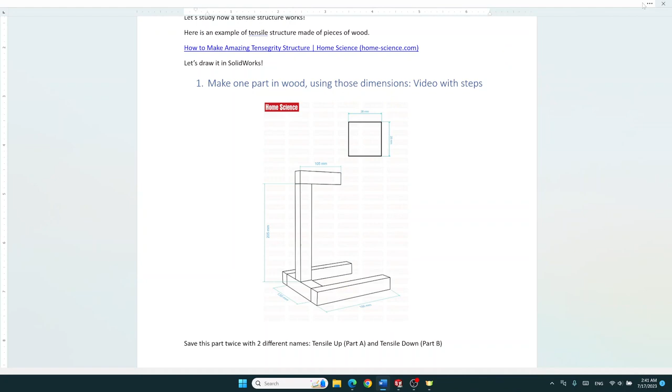And we will start by drawing this one and add the different features. Okay, that will be just one full part. All of this, like this kind of T shape, L shape. But I will start by this one. So 135 long and 28 by 28. The question is, where do I draw this part first? Where is the referential? Because the referential will be super important to find the center of gravity.

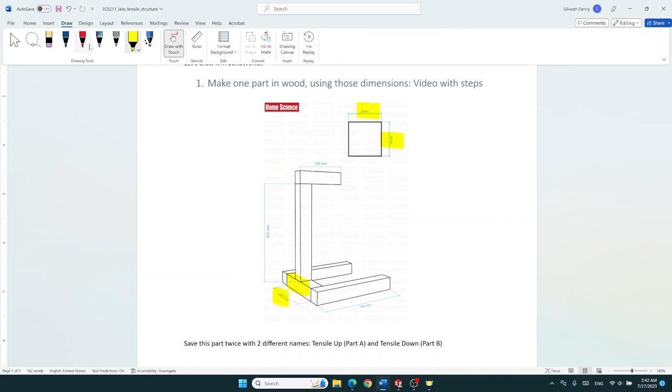So I will use a referential like this. So at the center, this one in the middle, that will be the y-axis, and I will use two axes like this and like this. So to have a positive referential, that will be x, y, and z. In Solidworks, the x and z are on the bottom plane, so that will be easier to follow the same thing. Oops, and that is the y.

So what I will do, I will select the plane x and y, draw a section of 28 by 28 and extrude it 135 on both sides. Okay, so I will have to draw my first little square. Let me draw it with another color, blue. That will be this little square there, you see, and I will extrude it. So let's do that.

Open Solidworks. I will make File, New, and I will select the part. First thing I will check is the unit. I will check the unit there. My unit should be millimeters. Okay, it's there. I will save my part, File, Save As.

So I will go into my ECE211 lab tensile structure, and that will be tensile part A. There's part A and part B. Part A. You can also add your name to it. That will be nice. Something that we notice, the section is only 28.

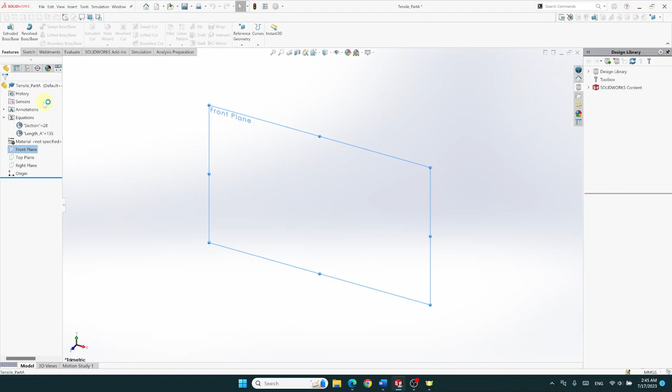Remember, we said that we will use the xy plane. So if you go over the different planes, you can see where they are. This one is the top plane or the bottom plane, the z-axis. This one is the right plane, zy, and we want to use the front plane. So we click on the front plane, and we go on Sketch and create a new sketch. Okay, we see this one is the 0, 0.

So we will draw a little square. And we want to align, so when we move, we have the vertical square there. That means that we are vertically aligned with the point, this way. We have the horizontal line aligned with this one. And we add smart dimensions, double click on that one. And instead of writing 28, you will click equal. I click equal, global variable, and I select section, and OK.

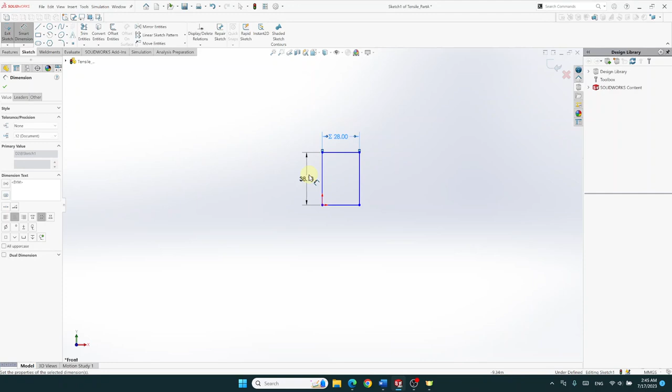Double click on this one. I click equal on my keyboard, global variable, section, OK. Oh, my little square is blue, so you never want it blue. So let's click OK. I want these points to match these points. So if you see, I can move it up and down. Maybe yours, you cannot move it up and down. It depends on the little relations that you added, and sometimes that's correct, but mine is not.

So I will click on the corner, bottom corner. I click Control on my keyboard and I select also the center there. Now I can say that they are vertical, horizontal, or even coincident. Let's put them coincident.

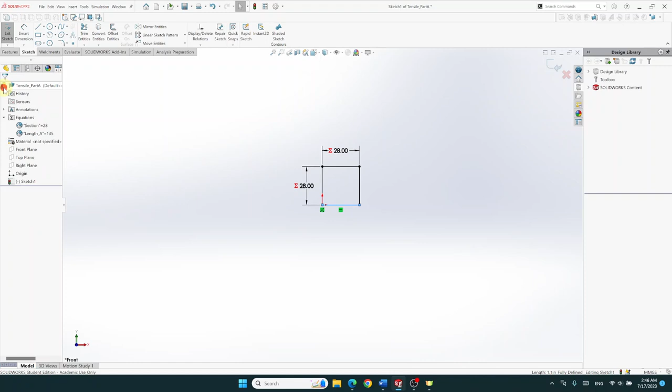That means that my square now is black. I mean it's fixed on the referential and it will not move anymore. I click Enter. If I try to drag it, I can't in any direction. Okay. And I can click on Features before I exit my sketch, and I can click on Extruded Boss/Base, so I will extrude it on both sides.

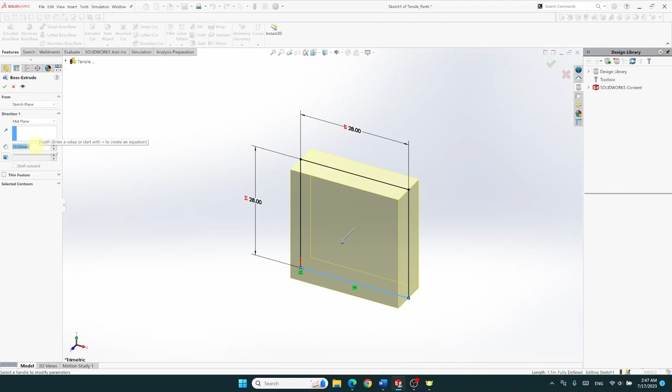I want to extrude it mid-plane, and the distance is not 10, it's 135 millimeters, but remember I made a global variable for that, an equation. So I can click equal, global variable, length A, and enter. And here we go, I have the first part. I save, always save. One thing I didn't do that I can do if I want now, but I don't have to, I can add the materials.

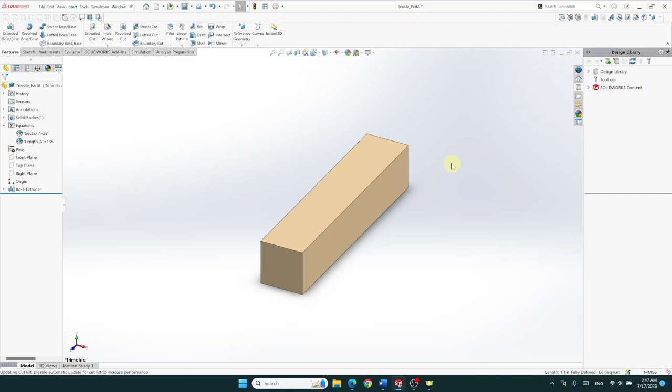Let's do it now. You right-click, edit materials, and we can use a wood, any one, let's say pine, apply. Oh, pine, I just have the density, that's perfect. I just need the mass density. Apply, and close. Here we go. Now it looks like pine. Don't forget to save. So I come back to my dimensions.

So I did the little part on the bottom. Now I need to add the front and the back and the up and the down. And you see we have 3 more dimensions to add. I will add them one at a time. Let's do this one, 190. And I can do both at the same time. So I will add a section in the plane YZ, and I will extrude it 190. Okay. So I draw the section there, and I extrude both of them together, 190.

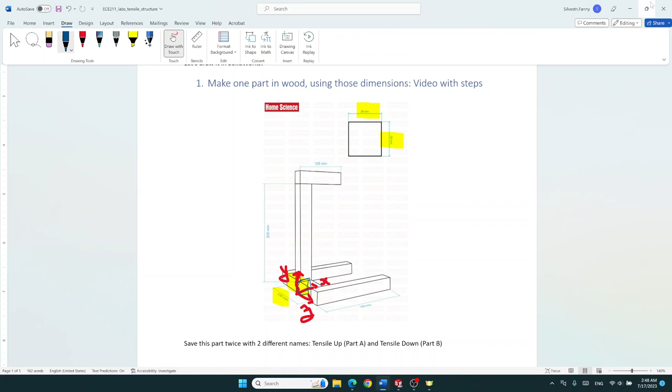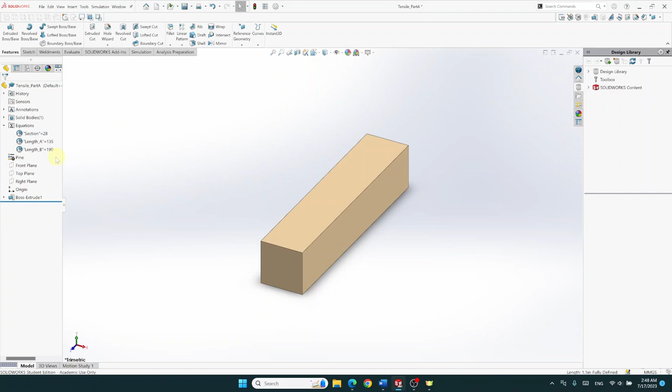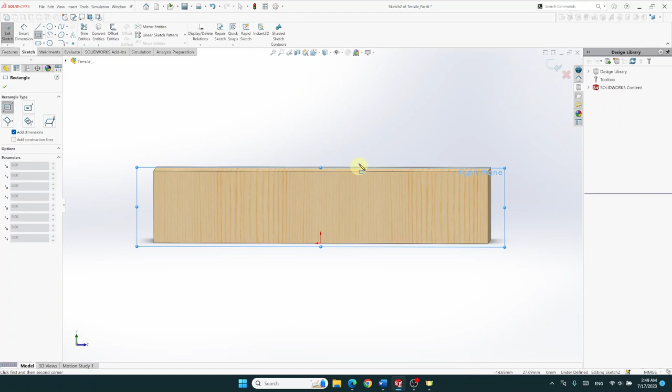So first step, let's go back in Tools, Equations, and I will add length B. It's a global variable, it's 180, enter. Okay. So remember, I want to be in the right plane, so I click on the right plane, sketch, a new sketch. Okay, I am on that side. If I want to be on the other side, I can click on Control. Let me remember. Not 1, not 2, 3. So 3 and 4 make you go on one side or the other side. That doesn't matter at all. Let me show you where we are. Okay, we are there, so that's perfect. Okay, so Control, I said 3.

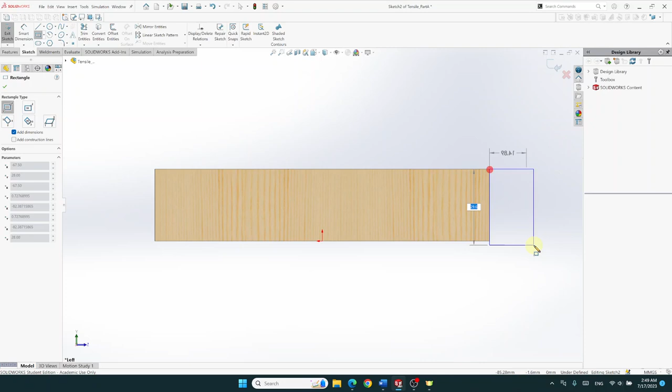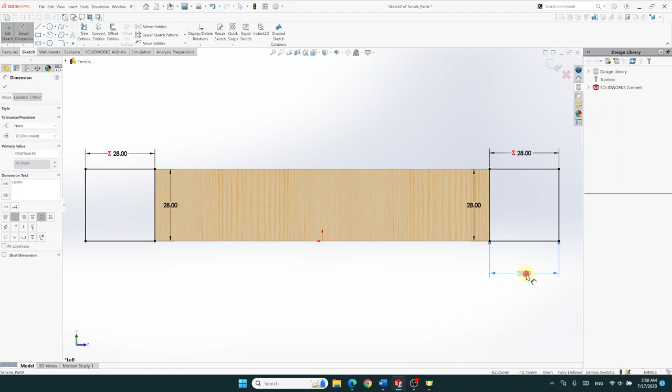Here we go. So I will add 2 little squares. I can select there. Oops, I forgot to click on the rectangle. This one, to this one, and this one to there. And I will add the dimension. So that's my section. That's also 28, equal global variable section. Enter. Double click. Equal global variable section. Enter. And you see it's black because it automatically fits with the bottom there. Oh, no, I don't want to do that one. Delete that. And that's enough.

And I will click on Features, Extruded Boss/Base. And I want to extrude it not 135. I want to click equal global variable and length B and enter. Here we go. Let's save. I have made those 2 lengths there. Let's add now this one on the top. So I will use the top surface of the first part that we drew. I will draw this 28 by 28 section and I will extrude it to 205.

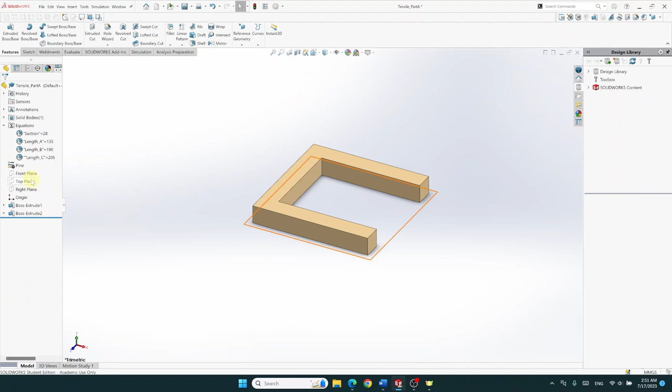So I need Tools, Equations, and length C is 205. Oops, I forgot. Length underscore C. Here we go. So I don't want to be in the bottom plane or this top plane because it's below the part. I want to be on the top because the 205 dimension is from the top. So I select the top surface and I will click Sketch and make a sketch. I select the square and I will make my square like this. Dimension is 28.

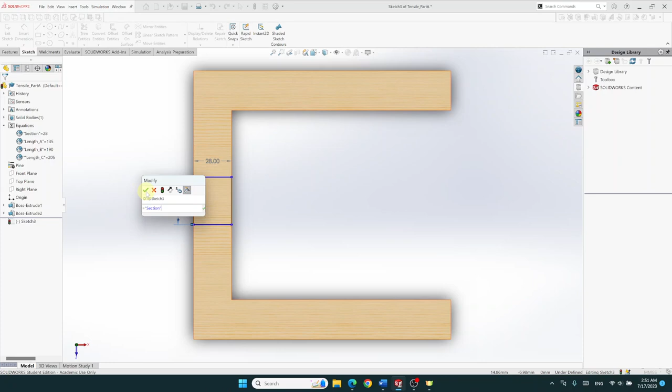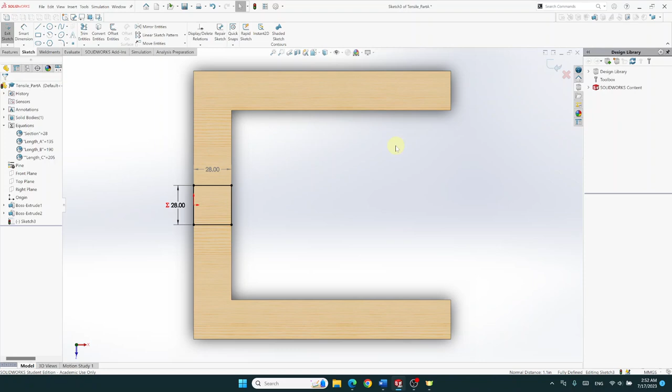Okay, and you see I can still move up and down. Oops. Let me remove smart dimension. So I need to say it's centered. There are different options. I can make a dimension from this line to the point of 14, or I can select this line, click Control on my keyboard, select the center of the axis, and select midpoint. So now my referential X and Y are centered on that little square. Perfect. Black means it cannot move, dimensions are set.

I click Features, Extrude, and I want to extrude it. Oops, equal, global variable, length C. Enter. Oops, I have to click like this. Enter. Oops. Let's go back.

Okay, let me just put, I think, because I put length at the beginning. Let's do yes. Oh, because I put this one. Okay, that's just my mistake. Let me go back on Tools, Equations. I'll delete this one. How do I delete this one?

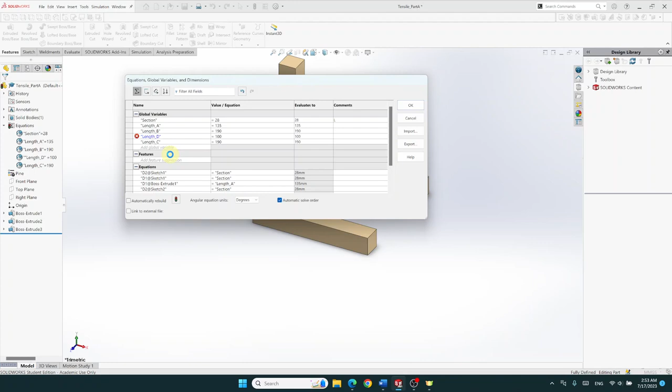Okay, I will use for the last one length underscore D. Don't do like me, okay? This one will be something else, 100. I don't remember. Oops, but this one will be 205. Oh my God. Sorry. Here we go. Oh, I see, I forgot this one. Oh, now I cannot escape. Okay, to cancel. Here we go. And now this one, let's do 205. You should see this one going up a little bit.

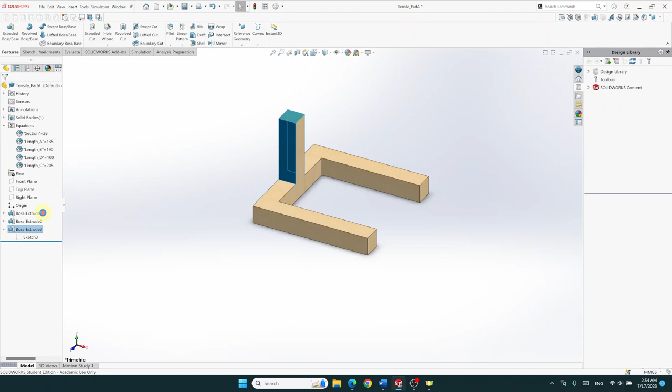Okay, so my length is 205, my length is 100, but for this one I used edit, I used length D, I want instead length C. Here we go. You should not have to do all of this. Okay, now it's good. I have my length C 205, and I will check the last one. So now I have to do the very last little part. Oh, it's not 100, it's 105. So we'll put 105. It's a 28 by 28 and 105 long.

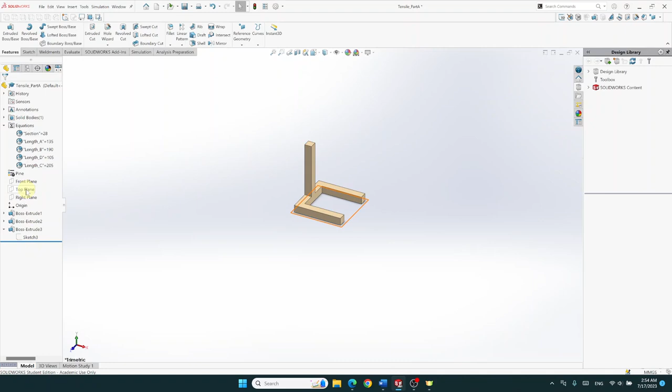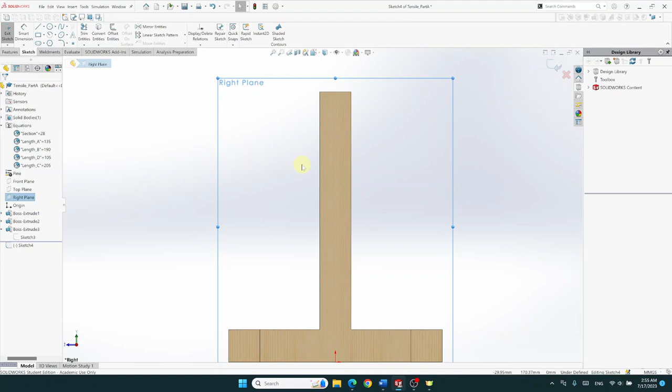So I go back there. I will change my length D right away for 105. That was my mistake. And they don't get in alphabetic order, but that's okay. Here we go. I can use the right plane on the back. Sketch. Edit the sketch. I can click on Control 2. No, Control 4, and you will see the view will be from the back of the right plane. You can try Control 1, 2, 3, 4, 5, 6, 7. You will see you change the view.

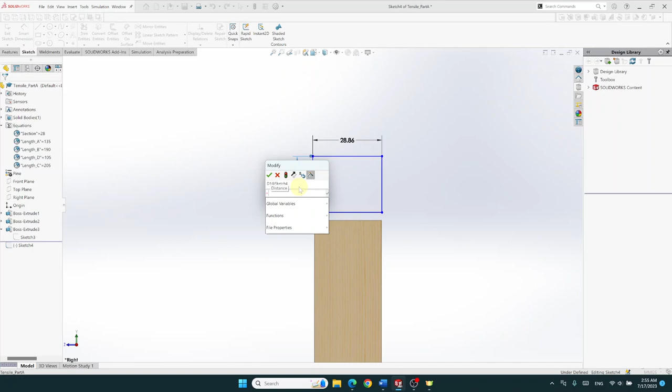Take a little rectangle and try to fit. Okay, that's okay. If that doesn't fit, I will make it this way. I will add this dimension equal to 28. Here we go. I will make this one and this one. No, I don't want to make a dimension. So click back on the smart dimension there so it's not highlighted anymore.

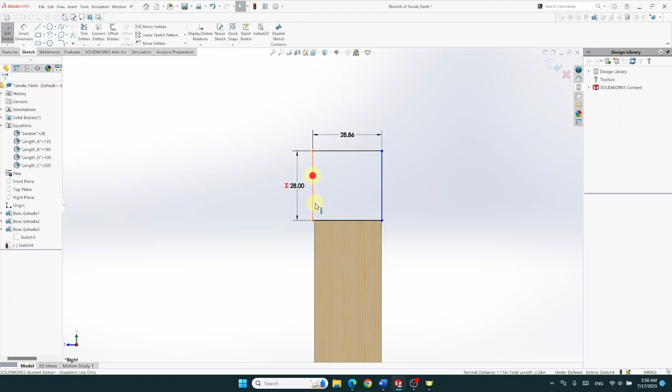I want to select this line, control this line, and I want them collinear. Perfect. And I want this line and this line collinear. Okay. And I can delete this dimension and make this line and this line collinear. Here we go. If your square starts to be red, it means you have too many dimensions, so delete some of them. Because this distance is 28, we don't need to add the 28 there.

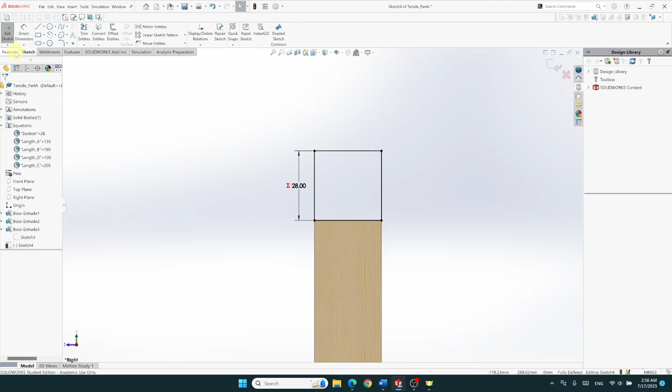And we click on Features, Extrude, and this one, equal global variables, the 105. Here we go. And this is our part. We have the wood and all of that. Let me click Save. So this is how to draw the parts. Let me show you right away how to find the center of gravity.

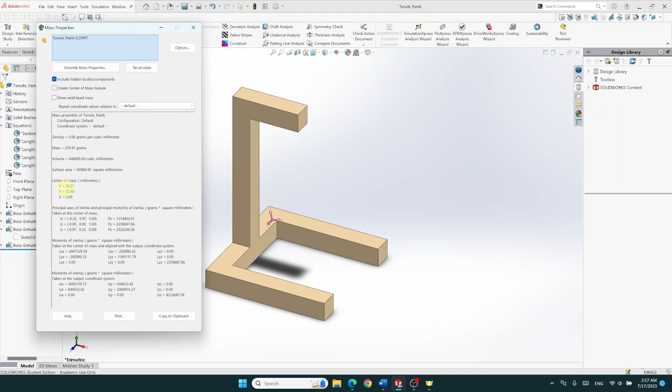That's very, very easy. You click on Evaluate, Mass Properties, and you can see the X, Y, and Z. Oh, I have something there. That's correct. So the X, Y, and Z, remember where it was? It was on the bottom. So our center of gravity is at 56.21 on X and at 72.60 on Y, and it's 0 on Z because the part is symmetrical.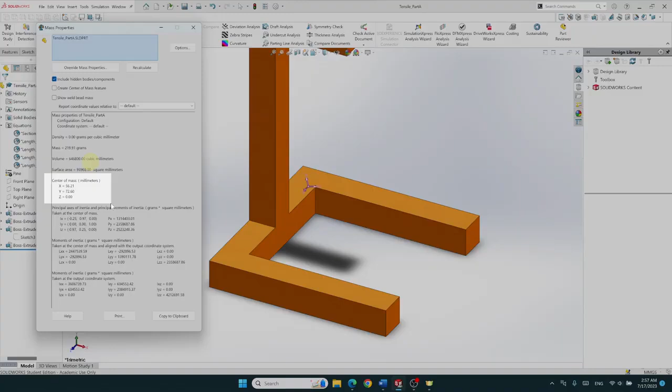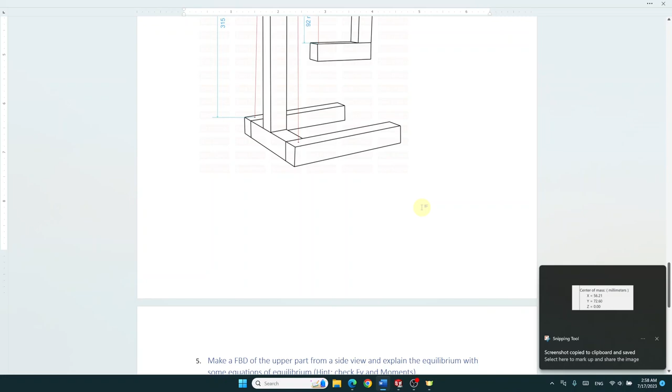So let me save that. I make a screenshot of the center of mass. Okay, I will add it to the document. Okay, for later. That's okay. Oops. Center of gravity. I put it there, but I don't know if I can make a screenshot when I'm taking a video at the same time. That's a lot. Okay, I cannot put it in the Word document, but I have it saved.

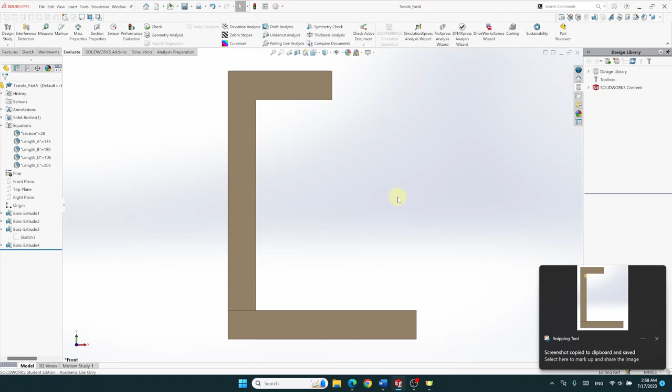And I will do one more thing. I will close that, and I will add pictures from that side. So I can add the referential on the bottom, and I can add the document. So that's it for the first video on how to find the center of gravity and drawing the parts. I will show you a video now how to save the parts twice and make it an assembly. And we can maybe add the line.